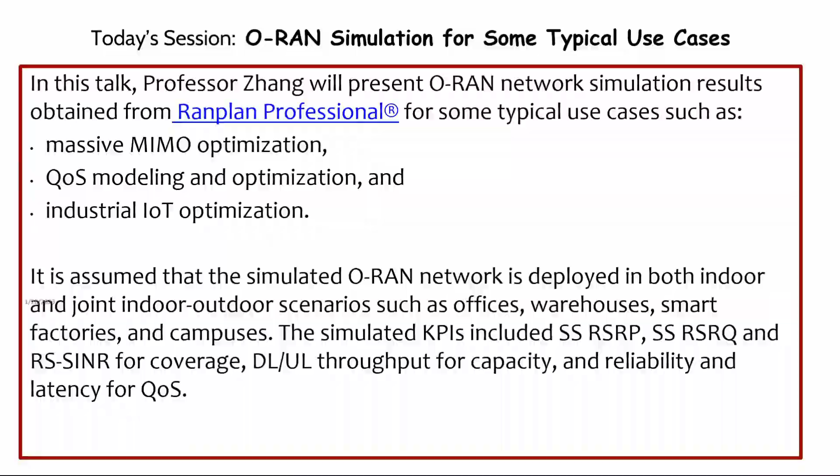Our speaker today has held the chair and professorship in wireless systems with the Department of Electronic and Electrical Engineering at the University of Sheffield in the United Kingdom since January 2011. He is also a founder, board director, and chief scientific officer of Ranplan Wireless in Cambridge, United Kingdom, a public company listed on Nasdaq First North.

Ranplan Wireless produces a suite of world-leading indoor and the first joint indoor-outdoor radio access network planning tools, known as Ranplan Professional, which is used by the world's largest mobile operators and network vendors across the globe. Along with his students and colleagues, he has pioneered research in small cell and heterogeneous networks and published some of the landmark papers and books on these topics, widely used by both academia and industry.

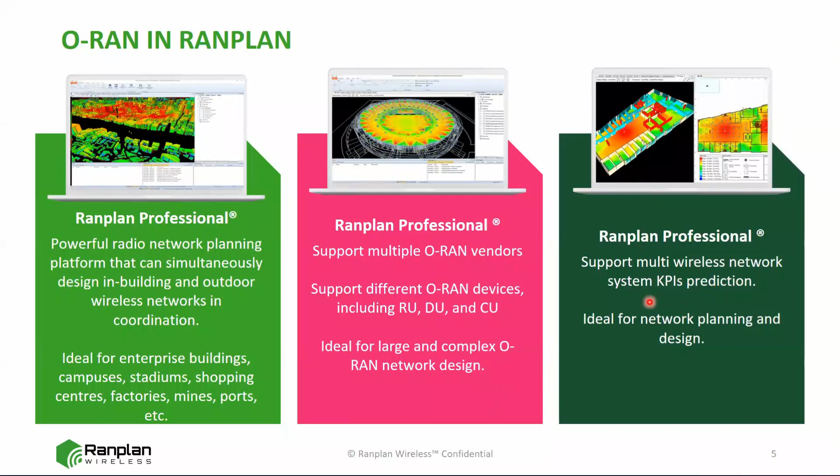Mines, ports, etc. As we support multiple O-RAN vendors, we support different O-RAN devices including RU, DU, and CU. So it's ideal for large and complex O-RAN network design, and we also support multiple wireless network KPIs. That's a quick introduction to Ranplan.

The second part of my talk is a case study. We'll look at a hybrid scenario, 5 kilometers by 5 kilometers outdoor, 25 square kilometers in Central London. We modeled this in detail, including digital terrain, buildings, foliage, and clutters—all this outdoor environment could be modeled.

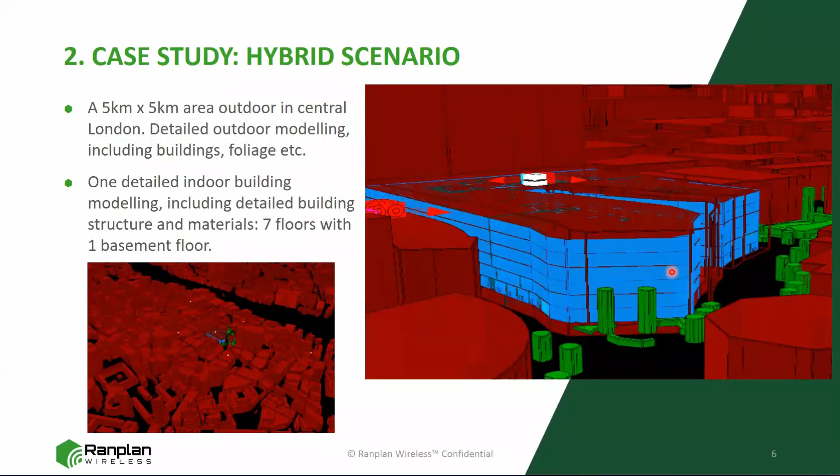This is a 5 kilometer by 5 kilometer area in central London. If you're interested in some of the indoor structures, you can see the walls, windows, and stairs, plus many columns and other elements. All these detailed building structures can be modeled, with different colors standing for different materials.

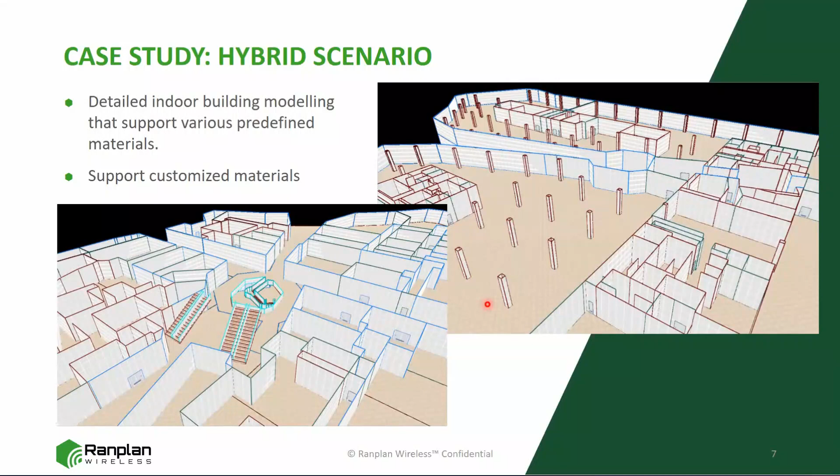If you're interested in 3 buildings, 5 buildings, or even hundreds of buildings in this scenario, they could be modeled in our software, allowing you to study both outdoor and indoor networks in coordination.

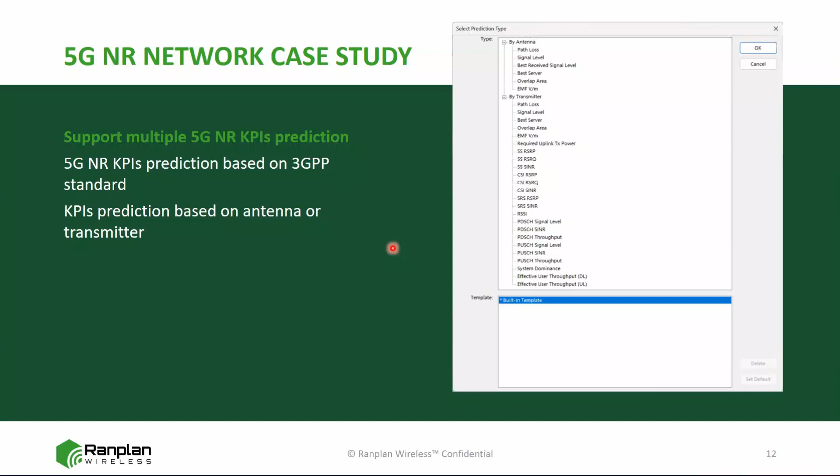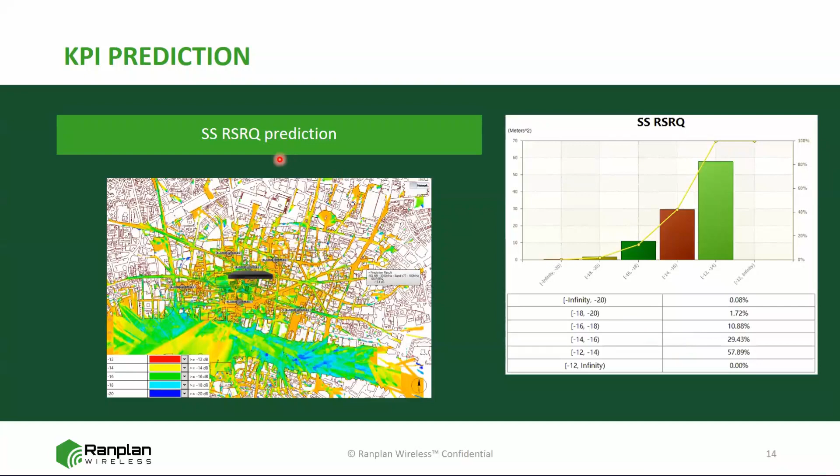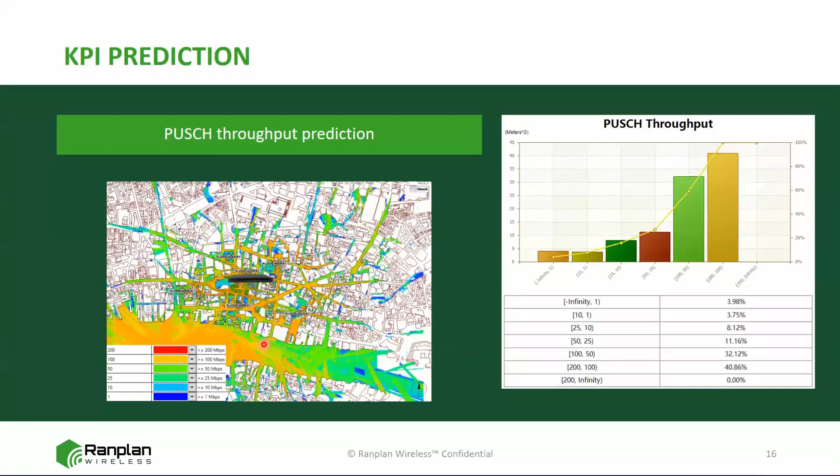So the next part is the KPI animation. Let's replay this video - you can see this from different angles. It shows you the network predictions from different angles outdoors, and also indoors, for each of these floors at 1.5 meters above the floor level.

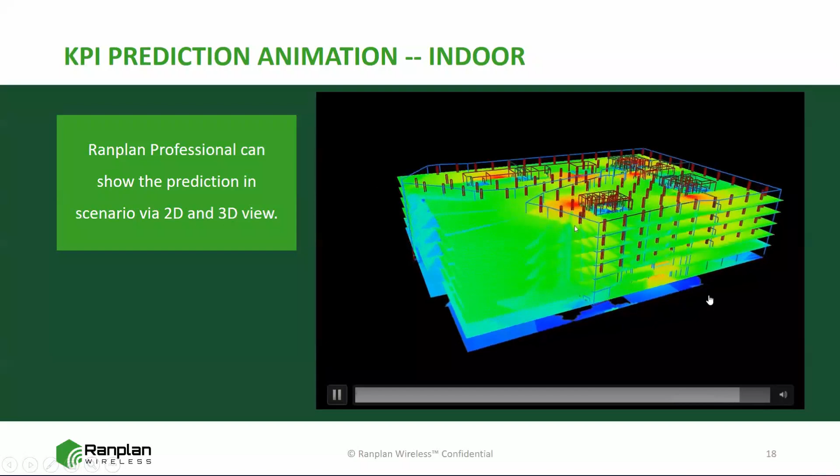Probably zooming into a particular area is more interesting, I think, but anyway you can see it moving and see from different angles. At least you can see the basement is not very good coverage - some areas in the basement, and also some areas near the lifts are not very good coverage, as you can see here.

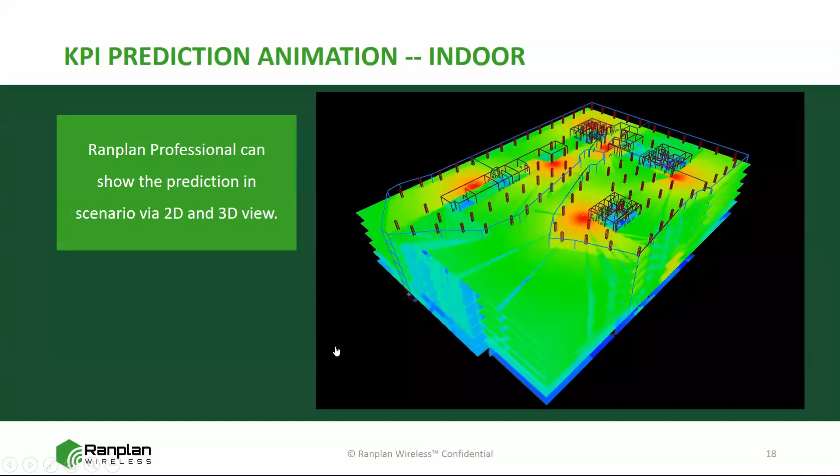So I'll go through this pretty quickly, I think. So why Ranplan? We have this kind of all-in-one network planning software - it's the only indoor and outdoor wireless network design capability in one platform.

If you're representing mobile operators, for example, it achieves 30% KPI CapEx/OpEx savings. If you need references, I can give you some from the APAC region - I actually just visited China Mobile Hong Kong just before Christmas, so they can provide references if you're interested to hear.

Hong Kong, you see, is quite complex - complex buildings, very complex urban area. It really needs good tools like Ranplan Professional.

We also have a large vendor-neutral database. At the moment we have more than 12,000 devices from different vendors, including all the top 5 - Huawei, Ericsson, Nokia, ZTE, Samsung, and many others, as you can imagine.

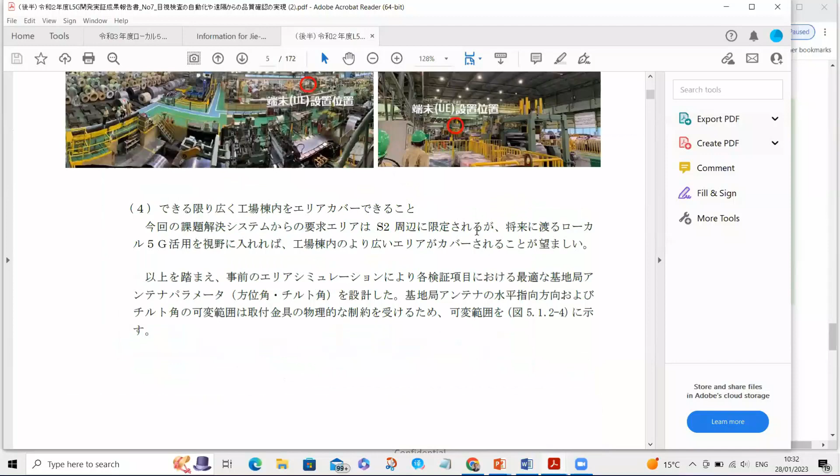This work was induced by the Japanese government, from the Ministry of Internal Affairs and Communications. This document is in Japanese. It's a 172-page document from the Ministry of Internal Affairs and Communications of Japan.

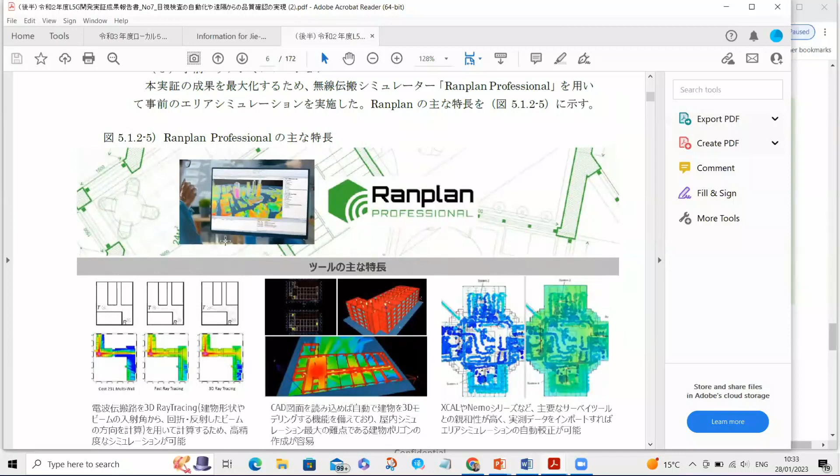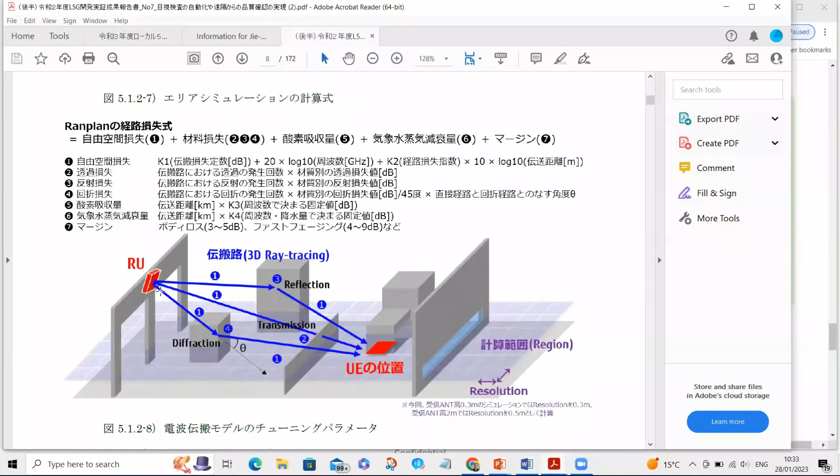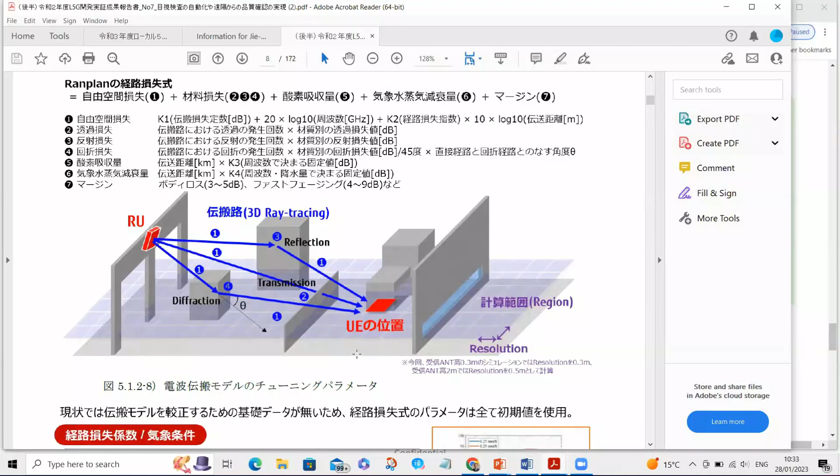There are lots of simulation results about Ranplan Professional in it. You can look at the exact scenario shown in this block. You see all these wave simulations are used, UEs and etc. All these diffractions, transmissions, reflections and etc. are studied. If you can read Japanese, I can guarantee this document says it's very accurate, the prediction matches the measurement very well. So that's all from Ranplan software.

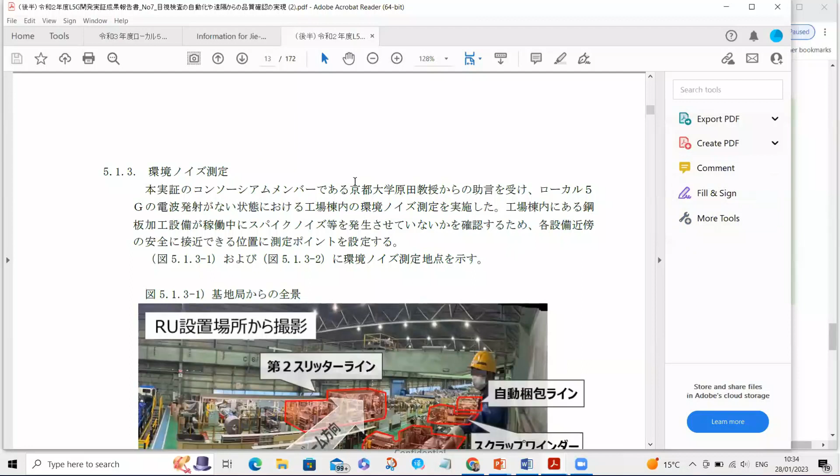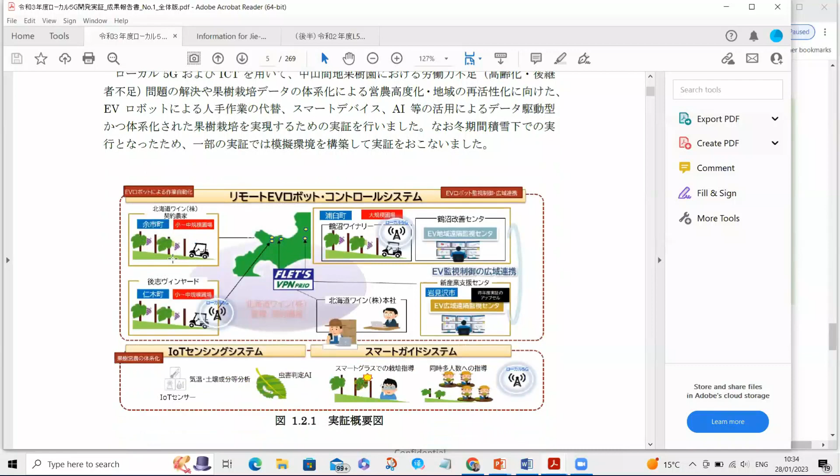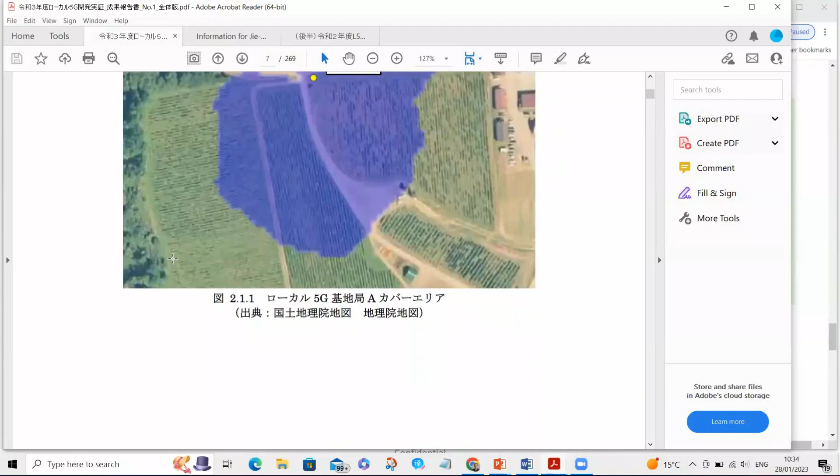What else? It's not only used for smart factories. In this case, also in Japan, it's used in agriculture. This area is for agriculture, not only for factories indoors. This is also induced by the Japanese government as well, for the use of Ranplan.

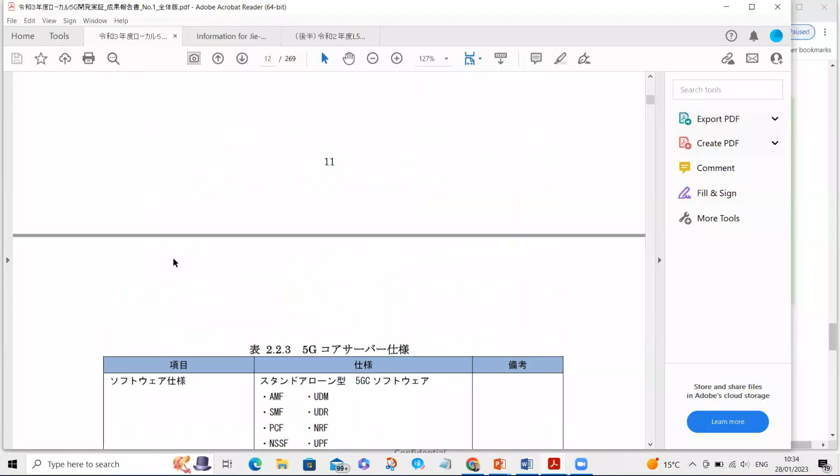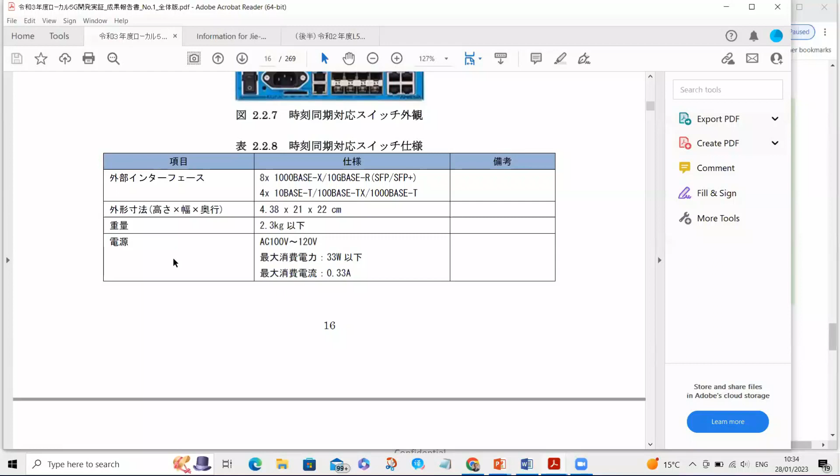So basically, Ranplan Professional is the de facto standard for private 5G network planning and deployment in Japan, and also in Korea, Taiwan, these Asia regions, and also in mainland China and Hong Kong. These are widely adopted already.

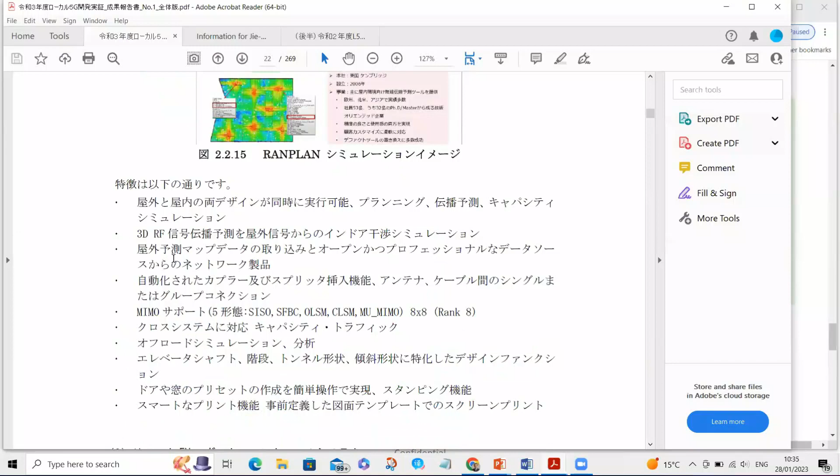You can see Ranplan referenced in this document. It's not everywhere, but you can see they use this software to study this. Let me get back to my presentation.

There are many other digital documents. If you are interested, for example, there's a short video on massive MIMO, and also short videos on private 5G network planning. Because we do not include O-RAN equipment studied in the project, we have not found, for example, a massive MIMO O-RAN device, so I could not provide that kind of simulation. But there's one massive MIMO optimization simulation in this video. If you are interested, please have a look.

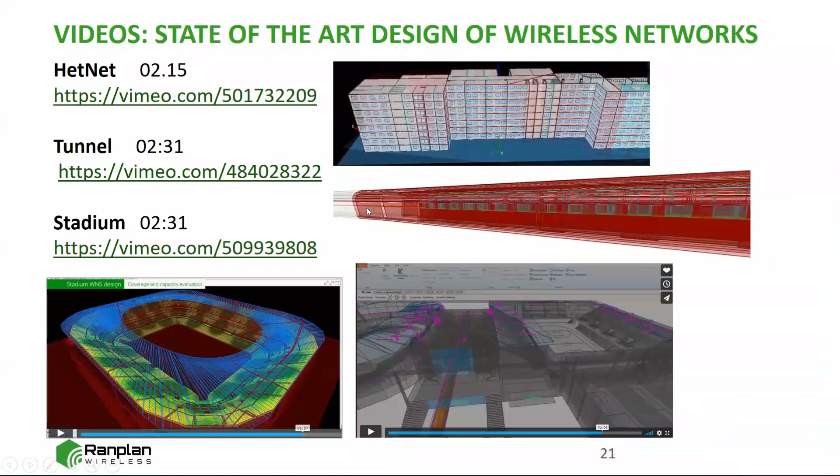There are also some videos about HetNet, about tunnels, about stadiums and etc. I think I can also find these on some of the website as well. Let's look at this tunnel one quickly.

Tunnels are also similar, I would say, to mines. So if we can model tunnels, we can model mines. Our software is used to model underground.

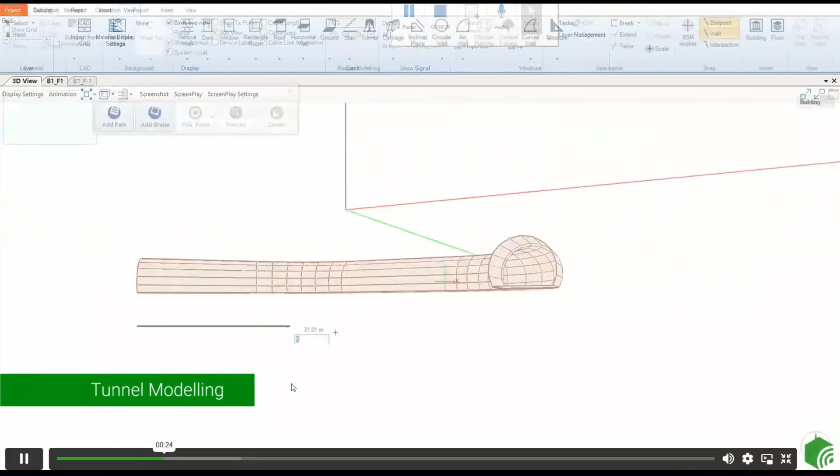If you look at all these tunnel modelings, we have very sophisticated, most advanced tunnel modeling capabilities, all the software you see. So you can also model this carriage.

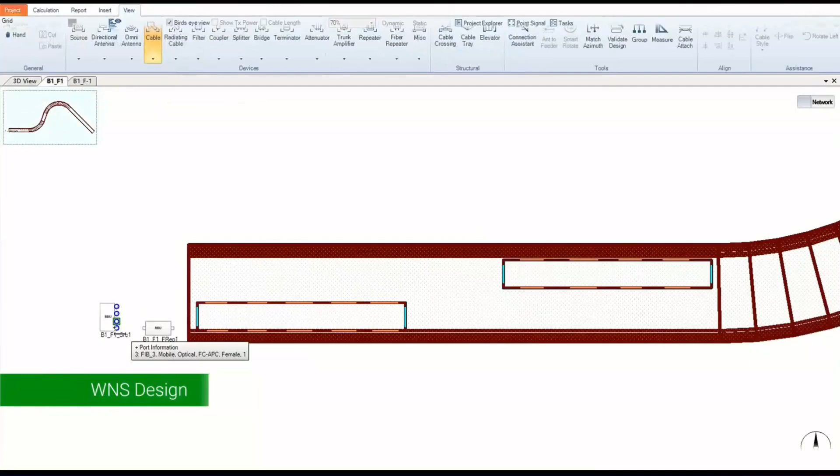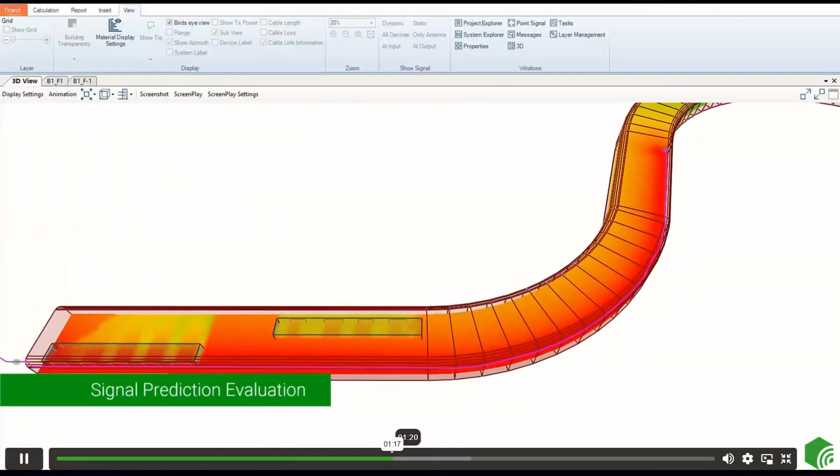You can not only model the tunnel but also the carriage as well. This is the network design, using some radiating cables. This calculates the coverage of these tunnels. You can see the signals inside the tunnel.

You can see how this animation is one of the features of the software. It's not for the video, it's part of the feature itself.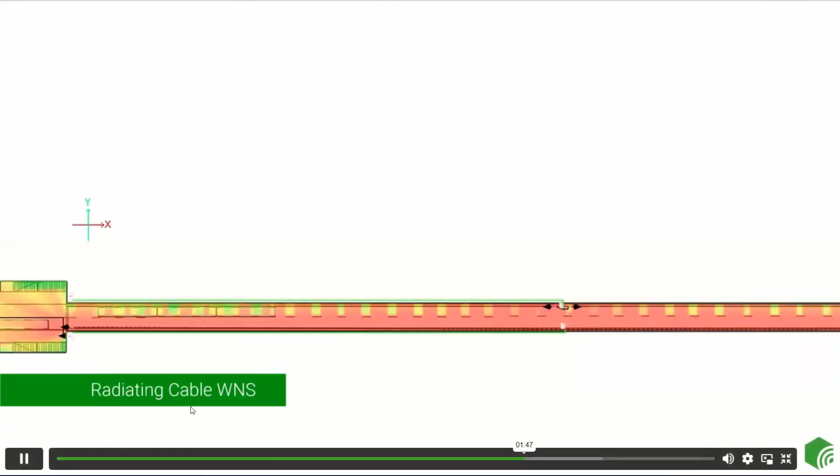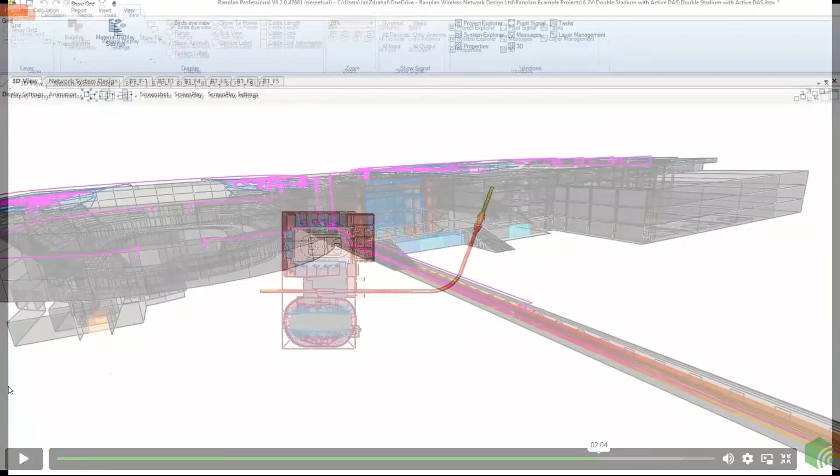Not only the tunnel itself, you can see the overground as well. You can see this whole complex structure in detail in one software, both underground, overground, and also if you want to extend to the city area, for example, 50 square kilometers or even larger, you can use our software as well. All this will be done with that software.

So we have this true 3D building modeling. It's a model of the entire topology for the outdoors, indoors, and also overground, underground, be it tunnels, mines, etc.

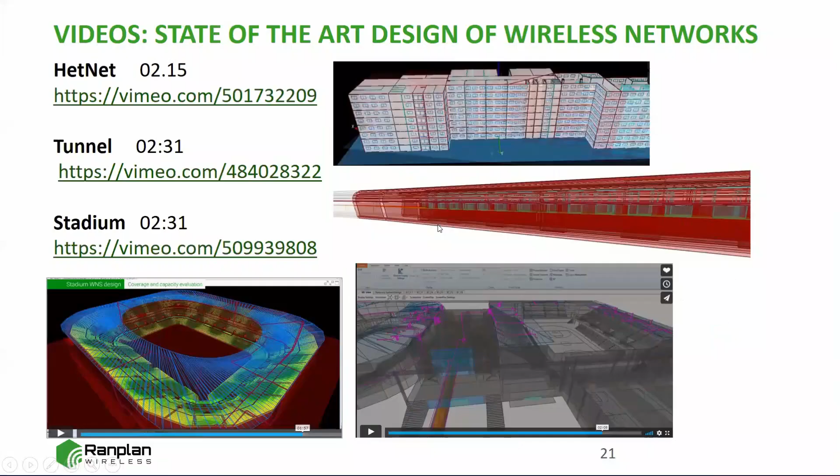What is a device to test that kind of KPI? Is it only a phone? After the simulation, they want to test the accuracy of the simulation. What device do they need to use? Is it only a phone, or are there any others?

That's a very good question. The devices, of course, we usually follow the 3GPP standardization. They have, for example, Cat 1 UEs, Cat 2 UEs, Cat 6 UEs, etc. All these could be already modeled in our software. So you can choose different kinds of devices following the 3GPP standard about UE capability.

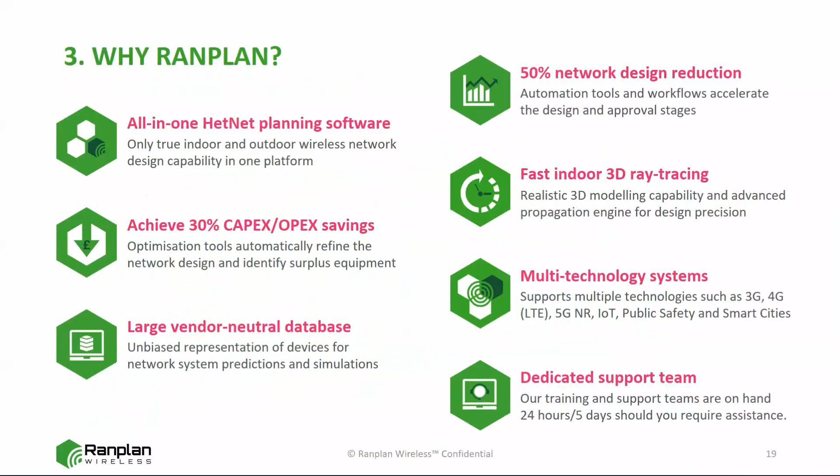Actually, I'm not sure about the situation in the Philippines, but in the UK, this outdoor geography information system could be found freely. This is provided by the UK government, and also in South Korea, the government also provides this kind of digital map as well. I think it varies from country to country. But on the other hand, if you need more detailed, high resolution, for example, 1 meter resolution...

Even you can buy from different vendors, as the one you mentioned. We have also different partners in Asia, and that's NTT Data, so to provide you with this digital map for the outdoor.

Okay, next question would be coming from Roel. Does it have traffic forecast analysis feature?

But this project is ongoing. We do not have a kind of commercial product for this at the moment.

So I can find something - for example, if we go to some of our research, let's look at some research project. Let's see, this is the one, for example, for more information. You can check the European Commission's website about this project. We work with Ranplan, connected by this - so you see we do some of the traffic analysis, but this is not commercial yet. Thank you.

Okay, thank you, Mr. Professor G. Next question would be a follow-up question from Clint: what are the best system applications you recommend when it comes to digitalization in the Philippine government, which was also deployed in foreign countries such as Japan and UK?

I think one of the things we need to do is digitalize some of the buildings. In particular, we can start from some of the publicly owned areas - outdoors, indoors - and let them be digitalized. These digitalizations also in terms of environment and also the networks as well, I think it's going to be very important. From this we can move towards the kind of smart cities in the future.